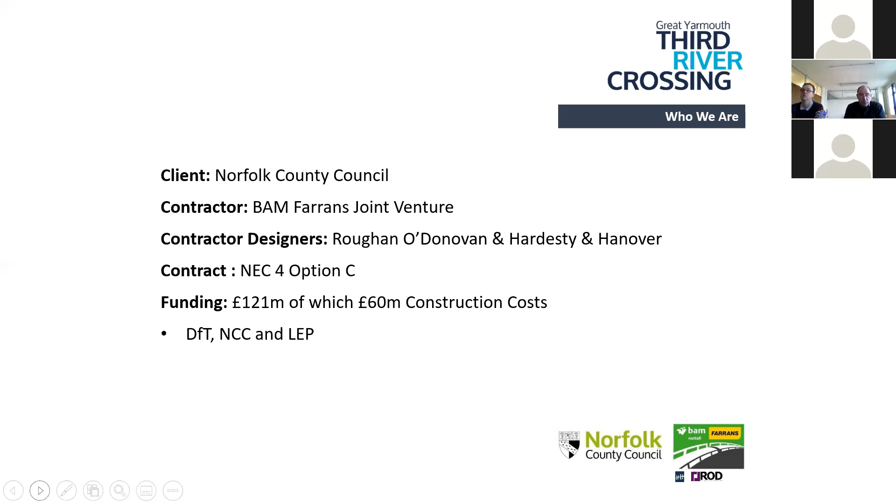So just to take you through the history of the project - development work commenced back in 2003, but Great Yarmouth has had a desire for a third river crossing for many, many years. Prior to that, I can remember it being talked about in the 1980s. It's strangleholded by just one bridge into the main area of Yarmouth, which has been a bit unreliable in the past, so it's going to be of great benefit to the town and community when it's finished. So development work on the project actually commenced in 2003.

A number of options were developed and assessed, and there was even a tunnel option considered. Work was taken on in a couple of stages, and the preferred route was adopted by the County Council in 2009. By adopting the route, the County Council accepted blight impact on the residential and commercial properties that were affected, and they had to invest a large sum of money in order to secure those properties.

Things went really quiet until August 2016, when the County Council secured some funding from the Department for Transport to prepare an outline business case. In November 2017, the Department for Transport granted the proposed scheme entry into their programme for large major infrastructure projects.

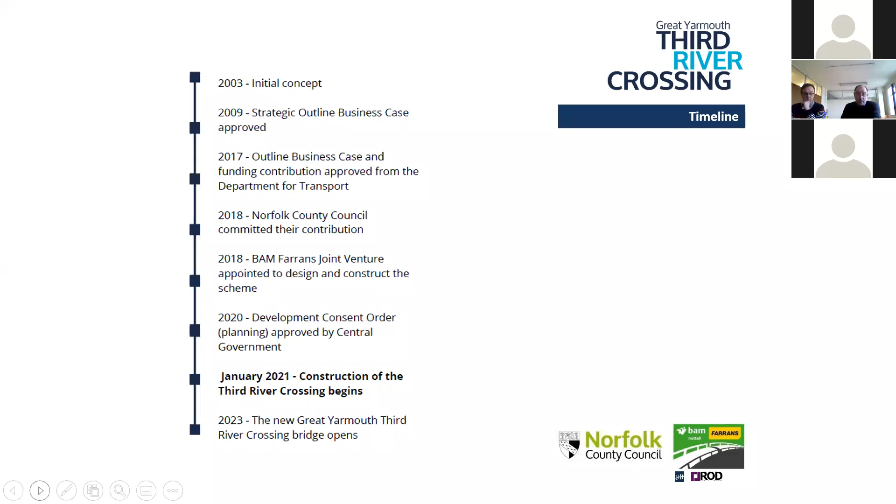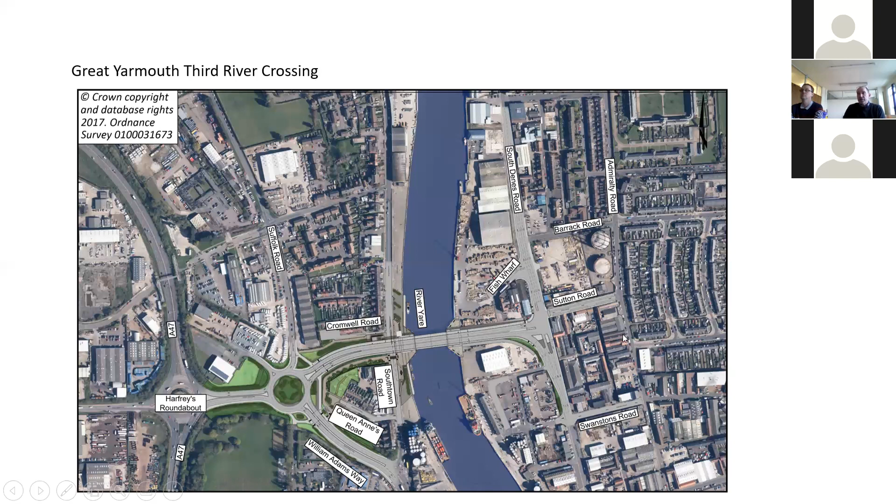So this is the scheme itself. As I said before, it runs from Harfrey's Roundabout on the west across to South Denes Road on the east. We have to do some improvement works to William Adams Way, as well as build a new roundabout which will link Queen Anne's Road and Suffolk Road to the new bridge. The bridge will run across the River Yare and link up with South Denes Road, at which point there will be a traffic signal controlled junction. We've got significant improvements to do along the length of South Denes Road, and that will then link up with the port area, which is down to the south.

So as part of the scheme, we've got 11 what were considered structures.

We've obviously got the main bascule bridge, which we call SO1. We've got SO2, which is a bridge that spans across Southtown Road. We've got SO3, the western approach embankment. We've got SO4, the eastern approach embankment, and SO5, an underpass we had to put in to enable Peel Port to operate the frontage and gain access underneath the bridge from one side or the other. We've got SO6, which is protection to some utilities.

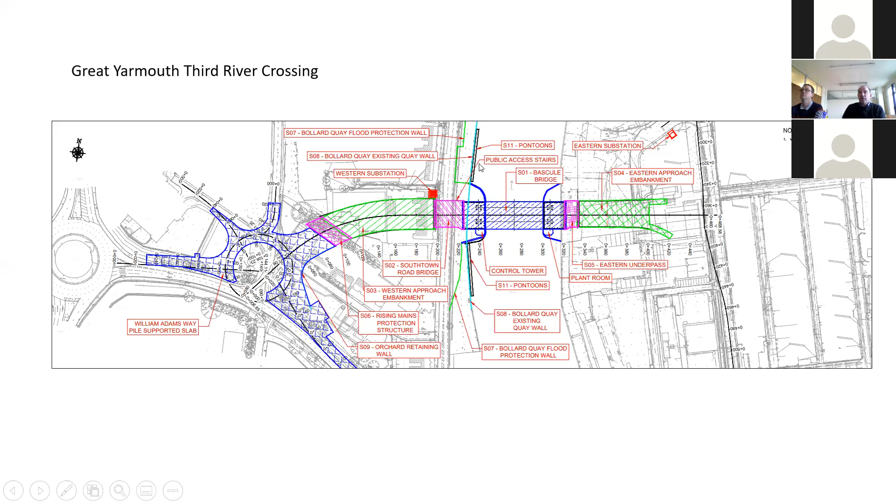SO7 and SO8 are linked with the existing quay wall. SO9 was... no, SO9 was the orchard wall, which is a small retaining wall. And SO10 was deleted, and we've got pontoons, which we consider as SO11, which is going to be mooring facilities for the smaller boats waiting to traverse underneath the bridge when it's finished.

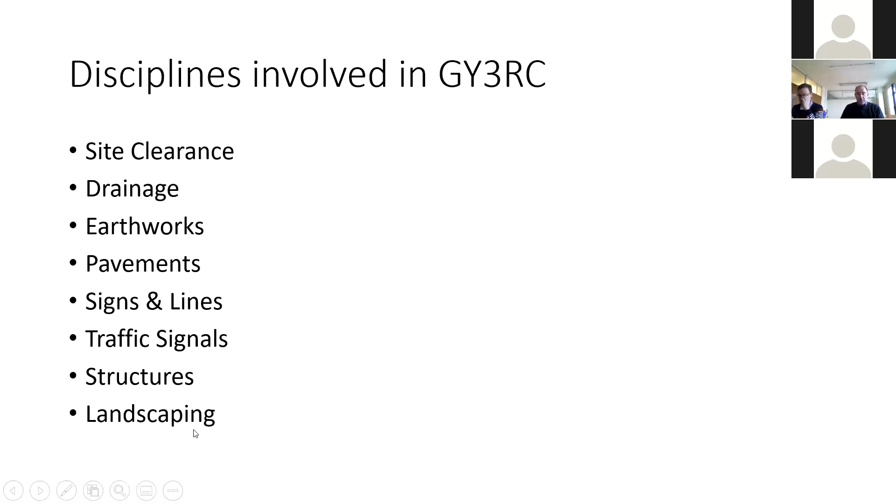So as well as the main bascule bridge, there's lots of other disciplines involved in the third river crossing works. We have site clearance, drainage works, earthworks, pavement works, signs and lines, traffic signals, the structures I've just been through, and then there's an extensive landscaping scheme at the end.

So as part of the design development, one of the requirements of the contractor was to develop a BIM model, not only to help in the design for clash detection, to allow the designers to plot all the utilities, plot all the various piles, plot the underpasses, just to see how everything worked.

This was an important part of the process. Not only does it help during the design process, but it also helps during the actual construction process. It enables the site team to work and actually update the model as we go through, so any changes carried out to the piling, the road alignment, or any unforeseen utilities, we can pick that up.

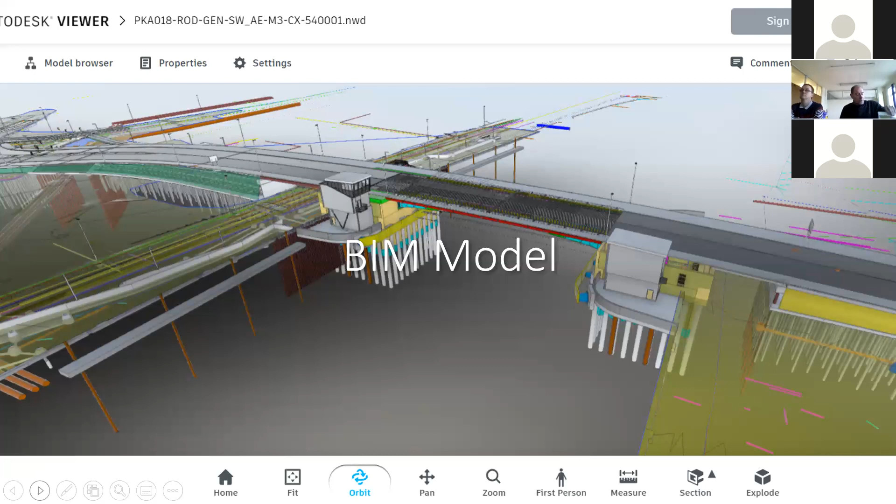Before we could start, we had to do all sorts of surveys, environmental surveys, noise surveys, etc. One of the surveys found out that there were resident water voles in and around the area, which were due to be built on.

Water voles are a protected species, and therefore Norfolk County Council had to apply for a licence from Natural England to relocate the water voles elsewhere. A couple of the areas identified, which were close by, needed significant work to improve the habitats. That was done in agreement with Natural England, and it formed part of the licence. It was carried out by working with the Internal Drainage Board and their ecologists, and also the contractor.

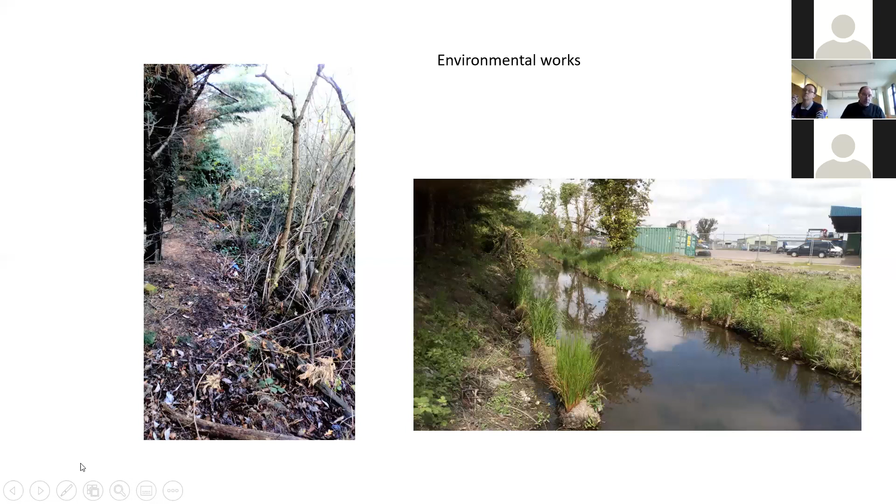This is an example of one of the ditches which runs behind the site, where very overgrown trees were laying over the watercourse. The water flow wasn't good, the quality of water was poor, and after it got cleared, it was planted with coir mats and coir rolls to help improve the margins and give the voles a suitable habitat to be relocated, which was carried out in April last year. We actually managed to catch 8 water voles and successfully translocate them to their new homes.

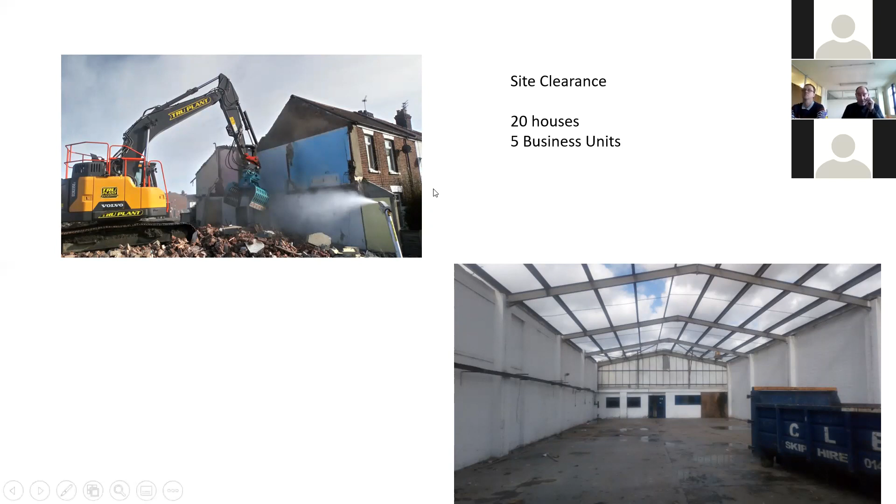Another part of the initial works was demolition of existing houses. We had 20 houses and 5 business units to clear. The completion of the demolition was May 2021, and that marked the first major milestone for the project. It was quite headline news in and around the area that we'd reached that milestone.

As with most major construction infrastructure projects, there's existing utility services to deal with, either protect or divert. In our case, we had 45 service diversions, as well as disconnecting all the utilities and services to the residential and commercial properties which we demolished. On the left-hand side, you can see a water diversion combined with a gas diversion, and also an electricity diversion, all in very close proximity. This is where the BIM model really helps, allowing you to see what space you've got and how you can plan in advance to get the utility diversions to work.

On the right-hand side here, this is structure SO6. It was a late addition to the project. The water mains weren't identified until trial holes were done, and the only way we could protect the water main was this structure, as there was no room to divert it. Anglian Water wanted it protected, so we had to build a large structure over the top.

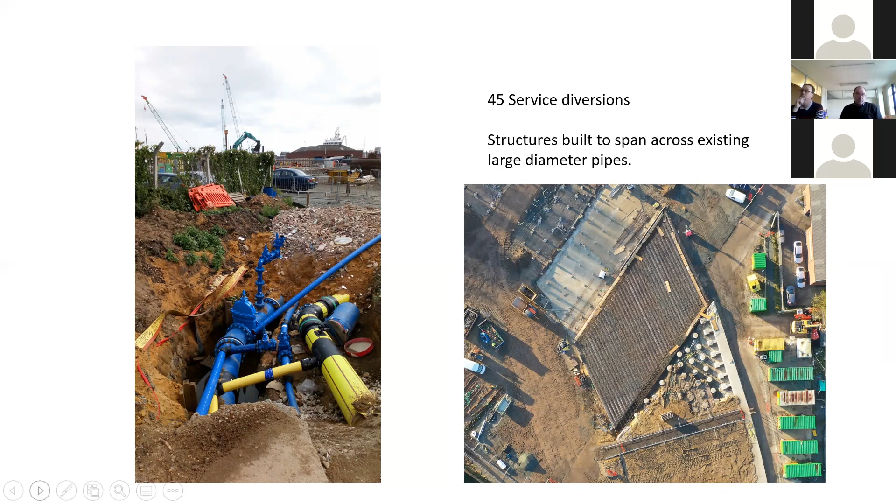The work consisted of constructing two cofferdams, one on the east, one on the west, and both cofferdams have vessel impact structures to either side. The piles themselves were manufactured in Turkey. They were 33 meters in length. There's a combination of tubular steel piles and sheet piles required to form the combi wall, and they were delivered by ship from Turkey.

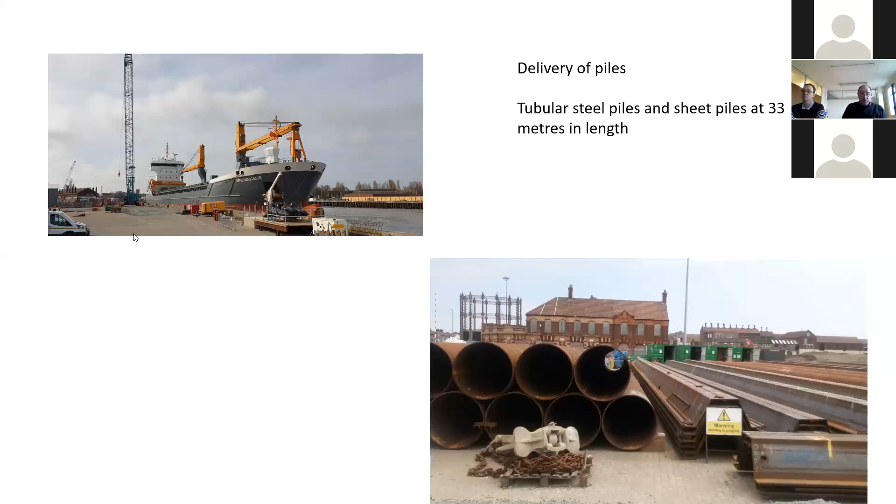It was an important time for the project because the delivery of piles was key to meeting the programme. The installation of the tubular and sheet piles, which form the cofferdams and also the vessel impact structures, were driven in, as you can see, from a crane mounted on a jack-up barge. It was done by a combination of vibration and hammer driven to their various depths.

There are a few challenges along the way. Obviously, when you're starting out driving such large piles in, the first row was fair to say a learning curve. Once that learning curve was overcome, the piling was carried out very successfully. It commenced in May 2021 and was completed by October 21.

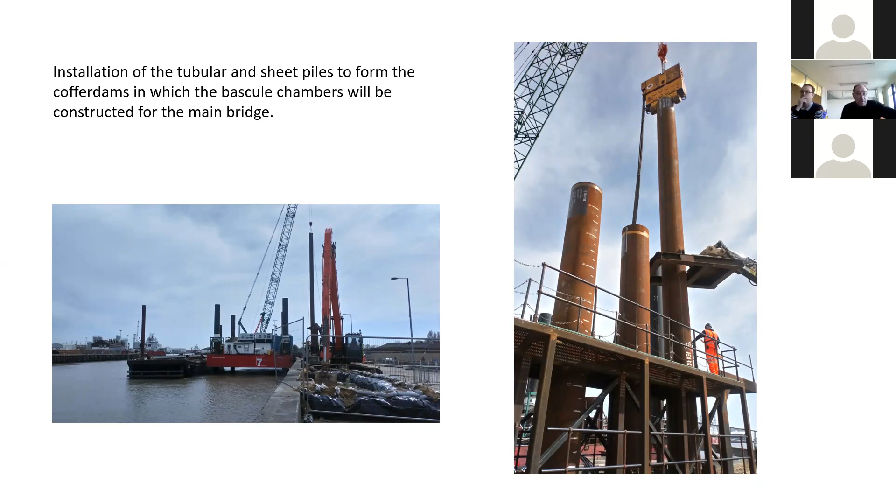This slide is just a view inside the cofferdam once the piling was completed. It's a combination of sheets and tubes, and we also had to drive some trunnion piles in here, which support the actual main bascule itself.

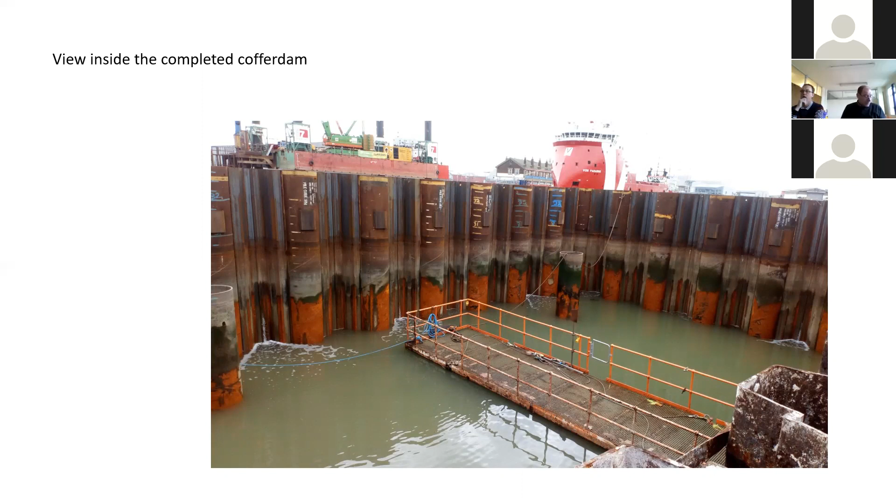Very significant temporary works were required to make a secure area for the guys to work in, and the water levels in the river can be up to 3 or 4 meters. There's a very large tidal range on the River Yare at this point, and it runs very quickly, with a wide tidal range of about 2 to 3 meters. Well points were installed in order to dewater and reduce the water level within the cofferdam, and there was a couple of vibrating piezos either end, just to monitor the actual level of the water underneath the excavation.

Following the excavation of the cofferdam, again one of the major milestones within the project was to get a concrete pour done into the base of the cofferdams. It was a very ambitious target, a very ambitious program. We had the first concrete pour on the 25th of November. Roughly about 950 cube of concrete was placed. The concrete pour started at 5 o'clock in the morning, and it was completed by about 7 o'clock in the evening, with the finishing off running into the early hours of the morning.

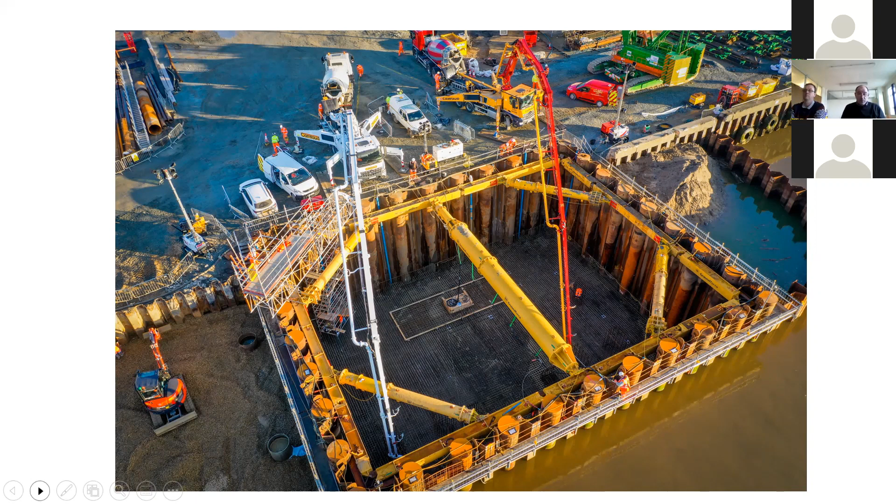This is a view looking southwards down the River Yare towards the river mouth, showing the narrowing of the channel. We've had to maintain a 50-metre width between the channels at all times to allow Peel Ports to maintain operation of the port. It's a very busy port, with some quite large vessels mooring through here which serve the wind farms and also the North Sea oil and gas fields.

So we've had close liaison with Peel Ports when we've been putting the cofferdams in.

Moving across onto the western side, the ground conditions were challenging, very peaty, with deep areas and pockets of peat. So the only way to achieve a sound foundation for the approach embankment was to do some significant piling. In total we've had 1,400 precast concrete piles, about 1,000 on the western side and about 400 on the eastern side.

One of the big challenges was the supply of the piles. Because of the shortage of lorry drivers, the piles were manufactured in Ireland and transported across to Liverpool. The shortage of lorry drivers in the country meant the delivery of piles was becoming a program risk. To mitigate that, the contractor decided to commission a ship, which brought 850 piles from Ireland around the coast to Great Yarmouth, where they were stored on the Peel Port side. That risk mitigation was very successful.

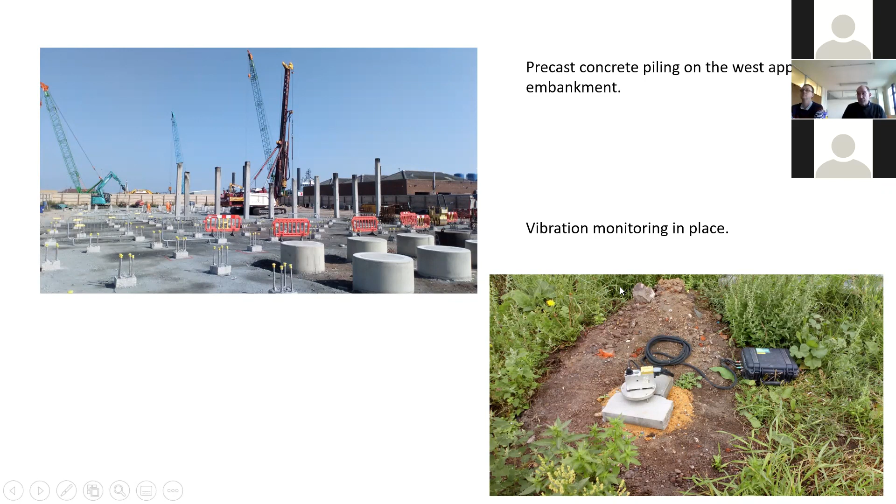We've been liaising very closely with local residents because some of the houses are very close indeed. This photo from the drone shows the properties on Cromwell Road, which were less than 15 or 20 metres away from the first line of piles, and some properties on Southtown Road, which were very similar. You can see the pattern of piling there.

So you've got the capped off piles, the edge beams, and the running beam, which has then been backfilled. That will provide the foundations for a load transfer platform to be constructed, which will spread the load evenly across so that we can build it up.

The embankment runs from about 1.5 metres in height - this is the corner of SO6 - through to about 7 metres. You can just see the line of piles there for SO2, which is the Southtown Road bridge. At this point here, we're roughly 7 metres in the air.

Southtown Road bridge will be constructed while trying to keep the traffic running. It's a strategic route into Great Yarmouth and a main bus route, so we've had to liaise with the bus companies and our streetworks people to make sure the network is maintained throughout. There's also a lot of other projects going on in Great Yarmouth, and we have to work closely with them to make sure the traffic flows are maintained.

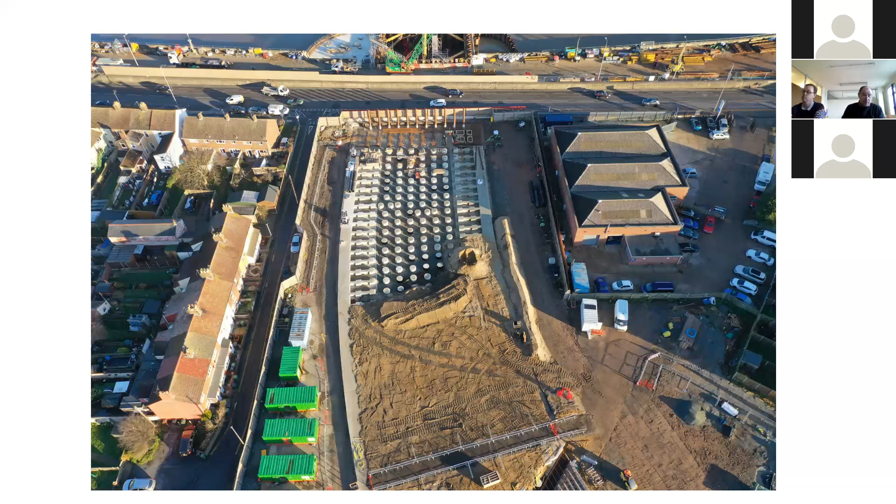Looking across onto the eastern side, the piling hasn't started - well, the piling has probably started today on the eastern side. This is the old Dalton public house, which we've got to maintain because the frontage is a listed building.

You've got South Denes Road, which runs along here, so that's going to be subject to a significant upgrade. And in and around this area, we're going to have the traffic signal control junction, which will monitor the traffic as it approaches the bridge and off it.

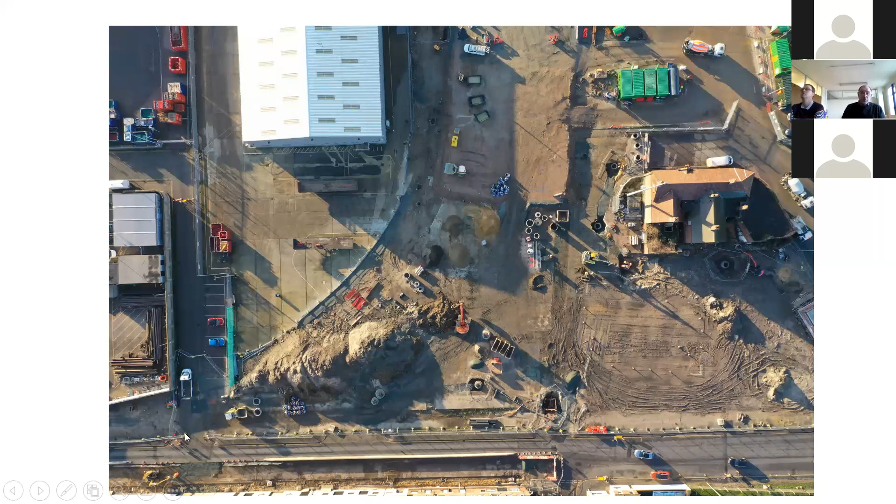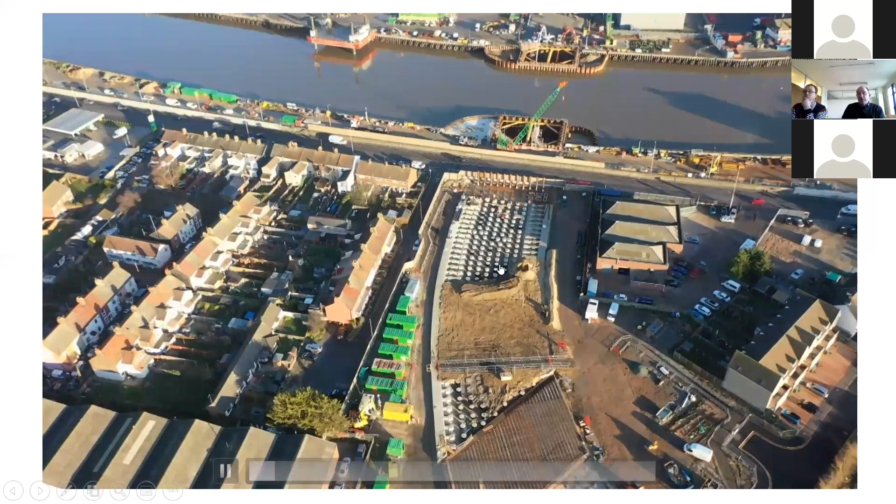We've been having a drone survey done on a monthly basis, so I thought you might like to have a quick look at it. It runs for a couple of minutes - you can see here the piled foundations on the western side, and the structure itself.

This was taken during the concrete pour.

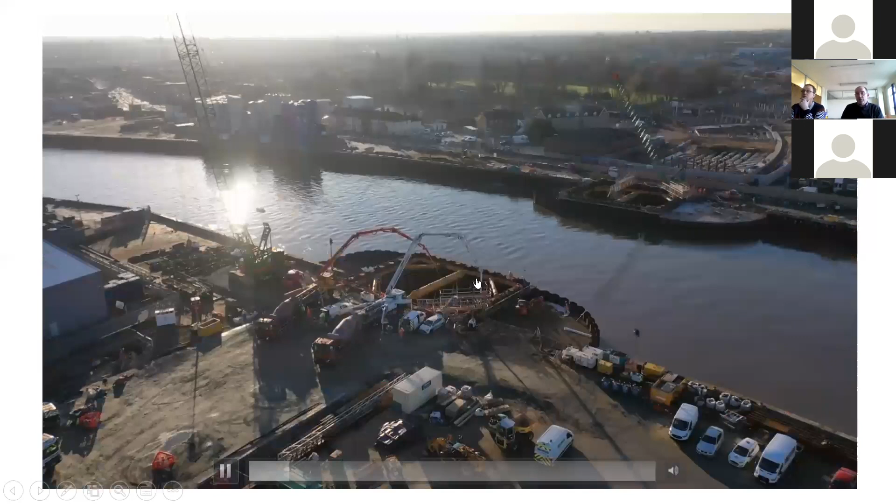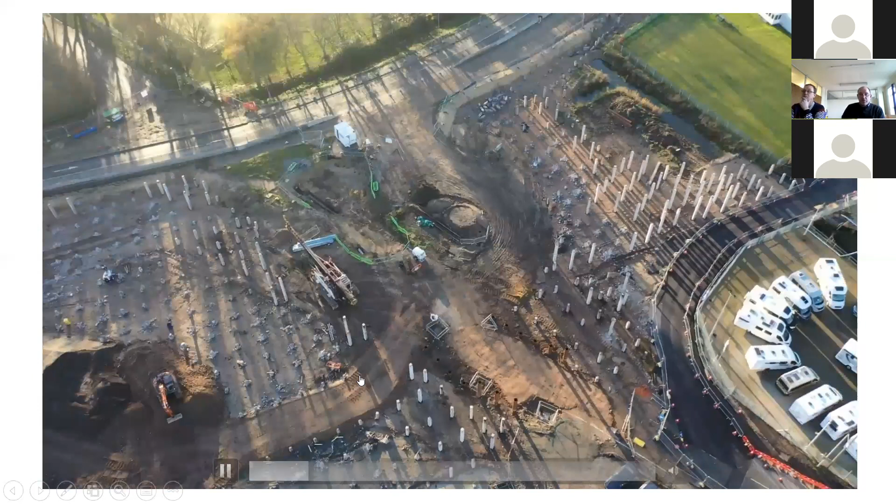So this is the roundabout, which we haven't talked very much about, on William Adams Way. You can just about see the shape of it forming now. The drainage has been very key to the project. We've had to work with the internal drainage board, the LLFA, to work out the capacities for the drains to allow it to run into the existing ditches. We have a large attenuation tank to build on the side here, which will help sort the flows out. They go into the various ditches in and around the Yarmouth area.

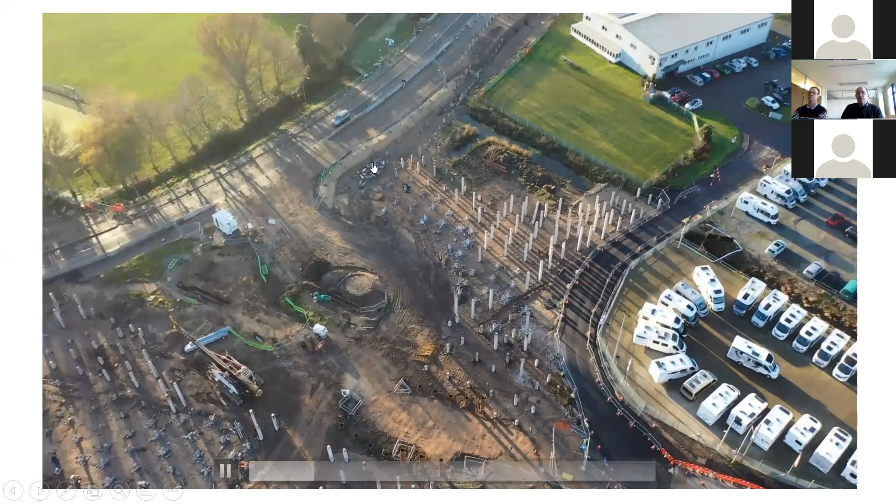I'll just keep running through it. So this is William Adams Way, which leads onto Harfreys.

So you've got the two main cofferdams, and you've got the vessel impact structures. On the southern side of the cofferdams, there's going to be 2 control towers. The main control tower is going to be on the western side, with the power plant on the eastern side. There's going to be a substation on either side, so we've had to work very closely with UK Power Networks in order to build a bespoke substation on either side to be able to power the bridge.

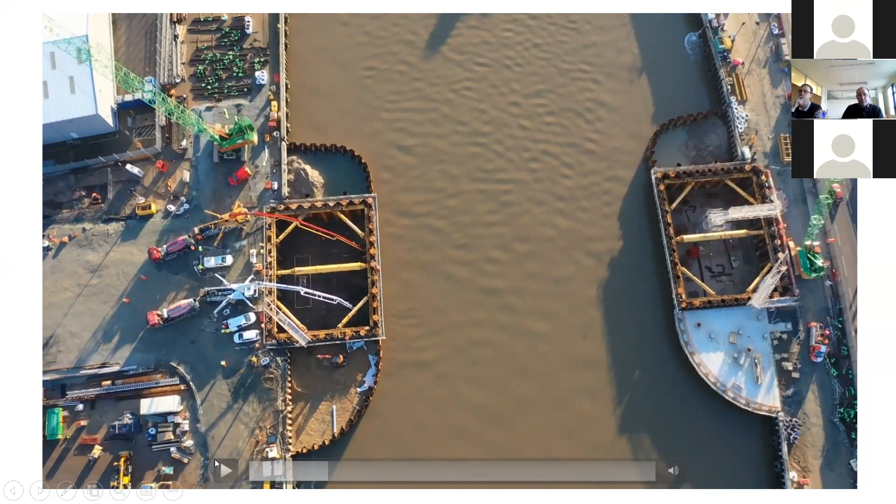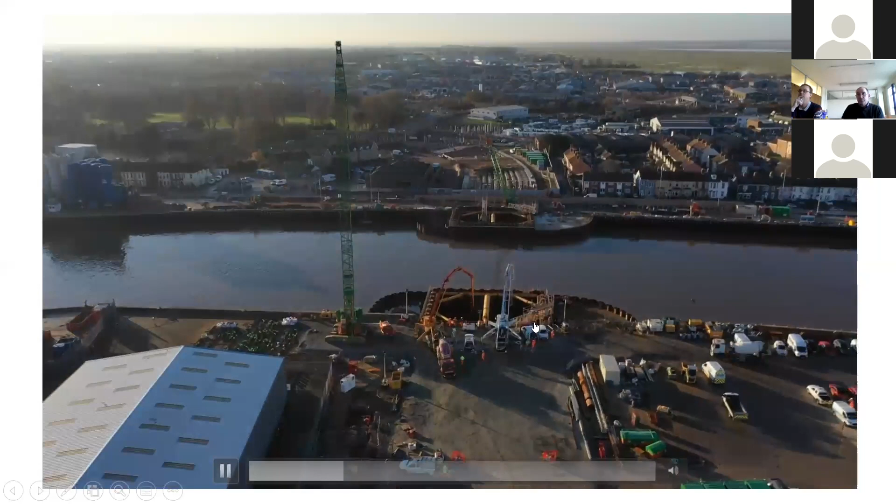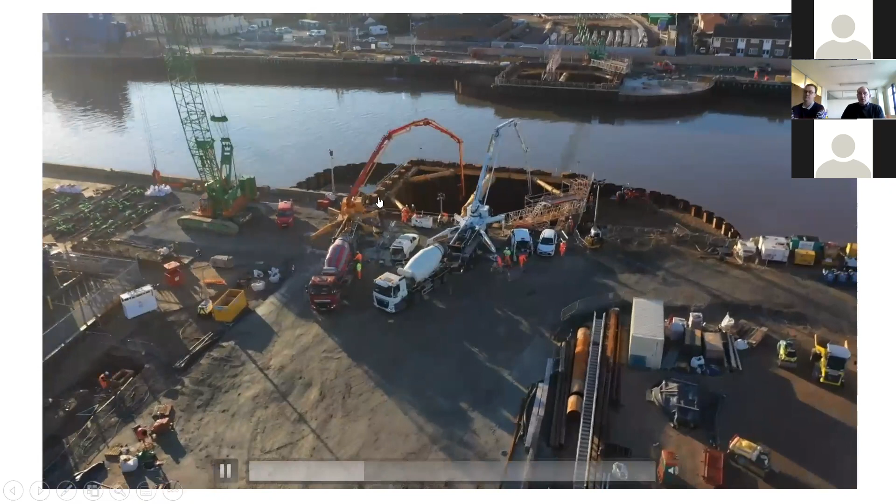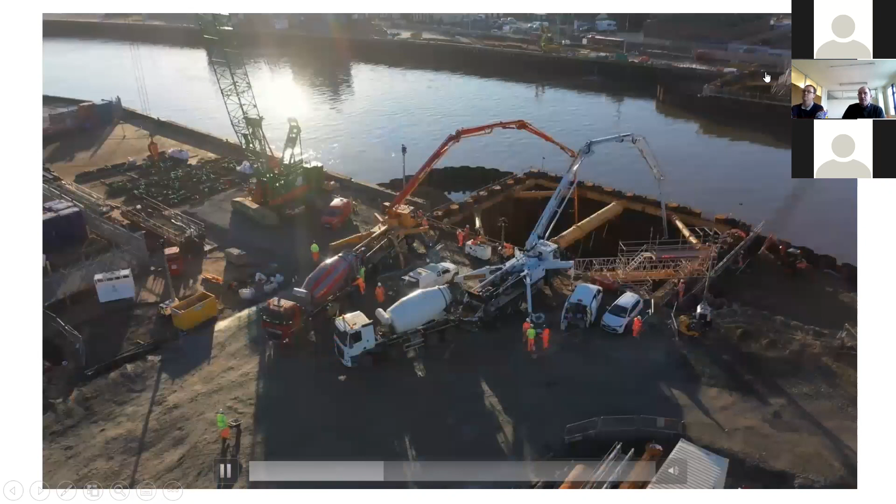See the concrete pumps? We were able to work with 2 concrete pumps on the western side because of the available space. Space on the eastern side was very tight because of a bollard quay, which is a narrow strip through here, so we could only operate with 1 pump. So the pour on the western side was carried out a bit quicker than that on the eastern.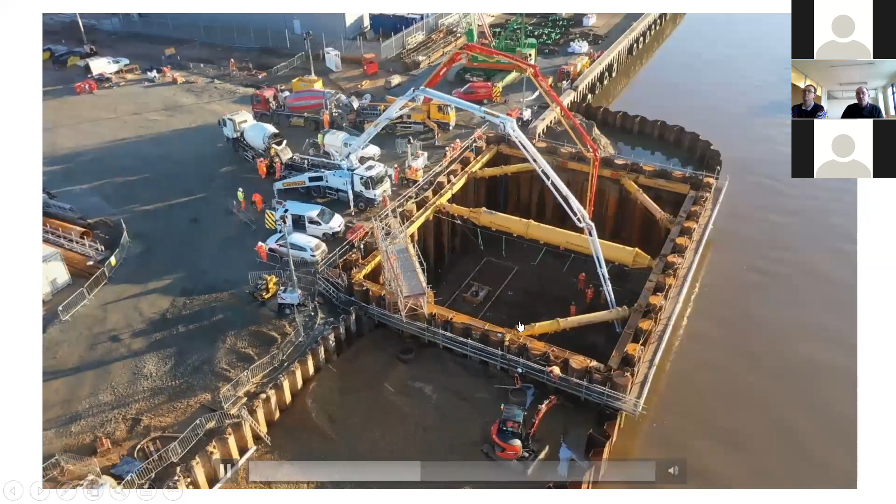You can see there how close the houses and commercial properties were to the piling.

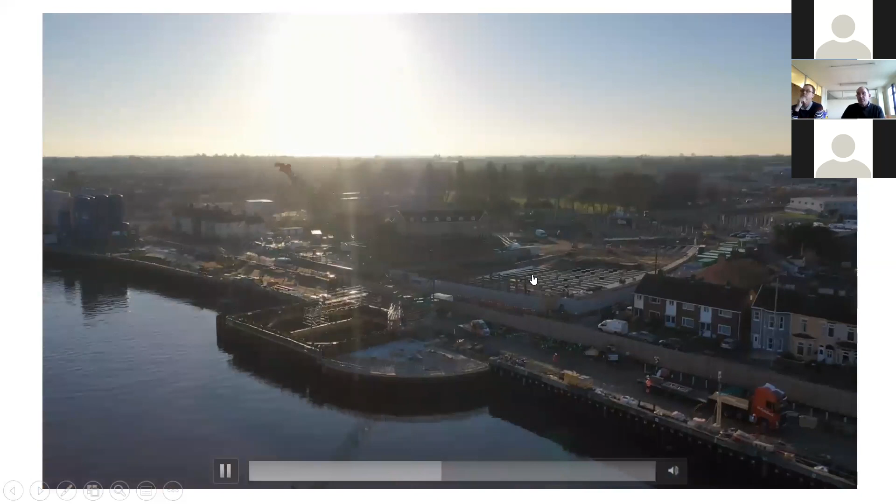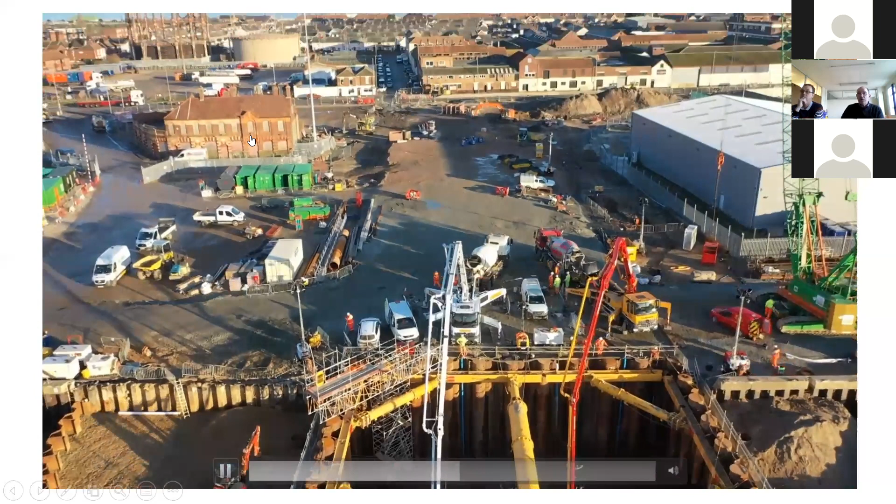And that's the eastern side where the Dalton Public House and the traffic signal control junction is going to go.

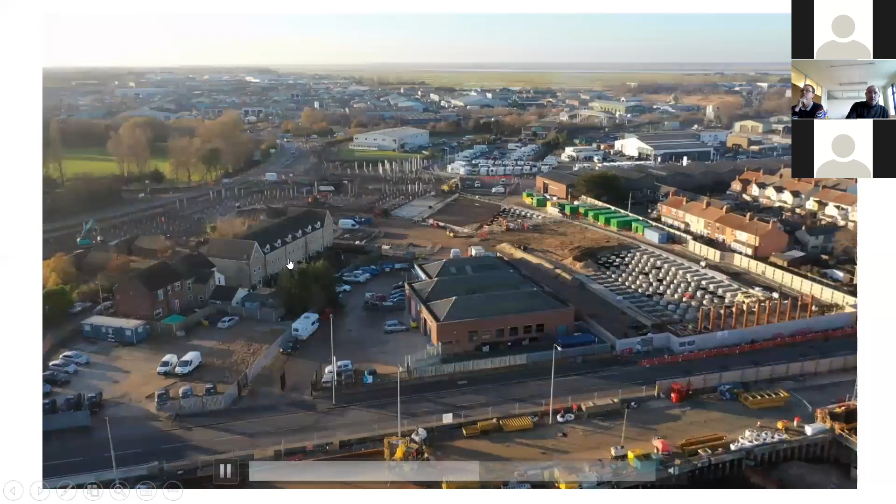So this is the stage we're at the moment. We had a good year last year. All the milestones were achieved, and it was a very good team effort.

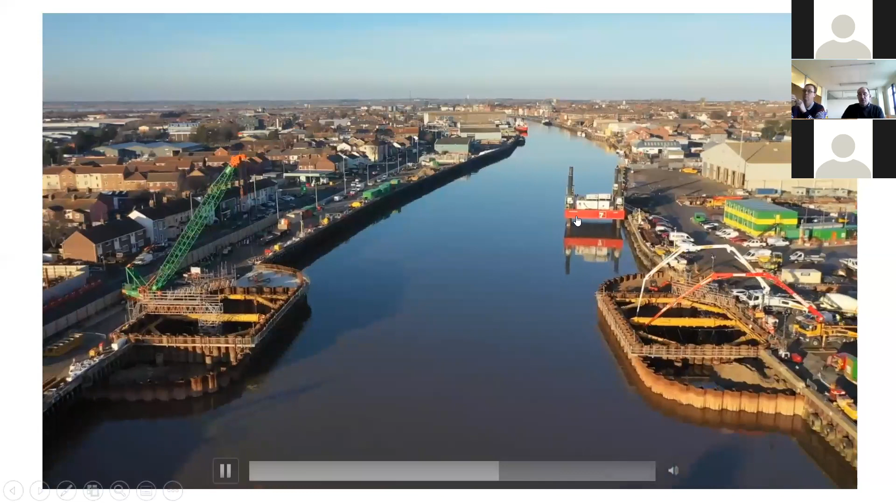And there's the jack-up barge sitting on the side, which was used to install the piles. We've got the site compound on the eastern side there.

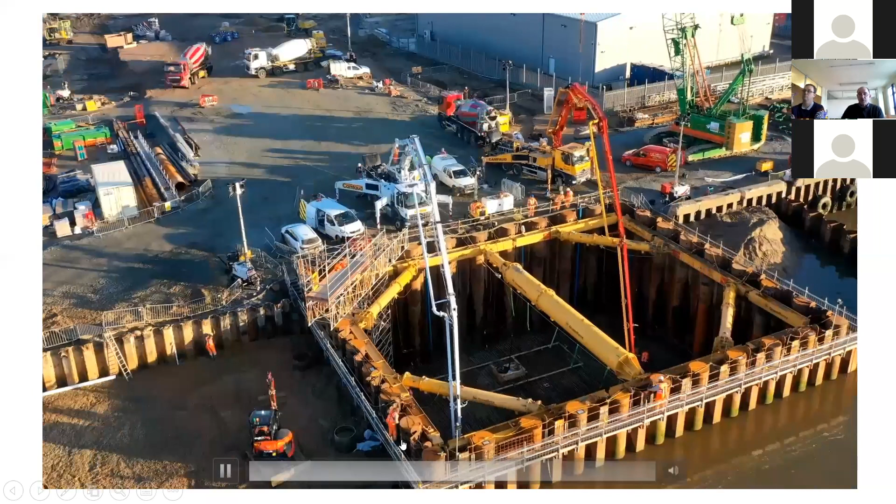That's just about it. We'll finish it there. Okay, so that's where we are at the moment.

Just to look forward a little bit, what we've got to come up in the coming months. Obviously, the foundation to the cofferdams is now in. Work will then progress to come out of the ground and get the cofferdam walls and the bascule chambers built, and the control towers progressed.

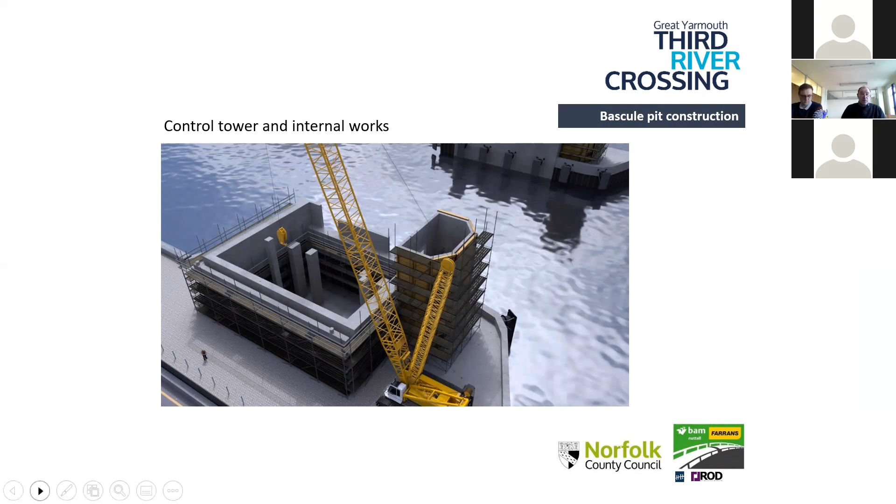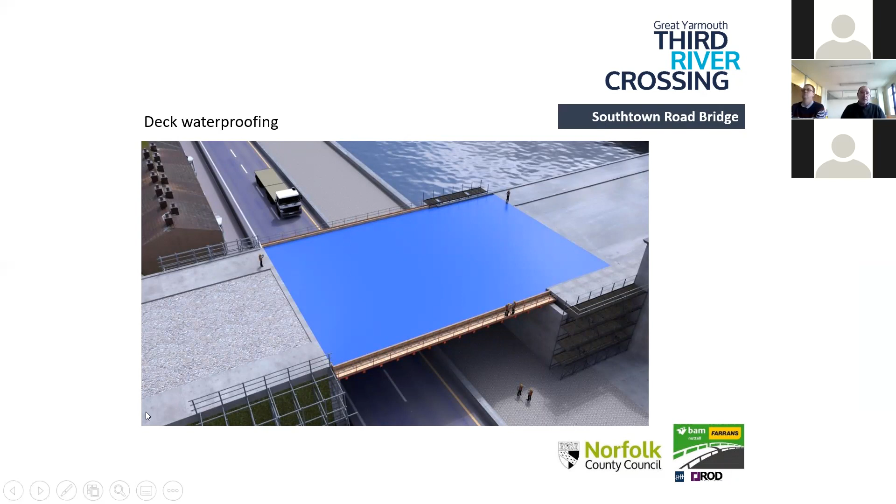The approach embankments are reinforced earth walls. So we've got a load transfer platform on the bottom here, which sits on top of the precast concrete piles. And they're going to be built up in steps.

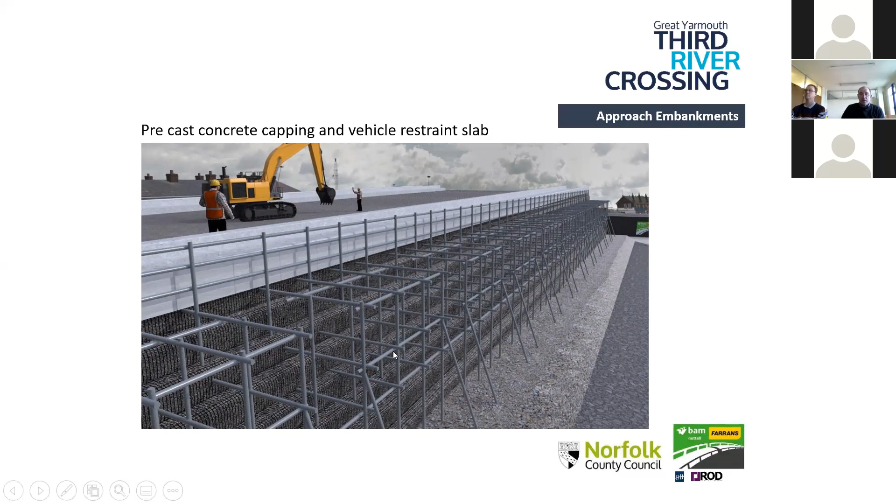One of the requirements on the western side is that we have a green wall. That's because it'll soften the visual impact. At this point here, we're nearly 7 meters high - you can probably gauge that just by seeing the top of the buildings there. So we've got this green wall going in on the western side.

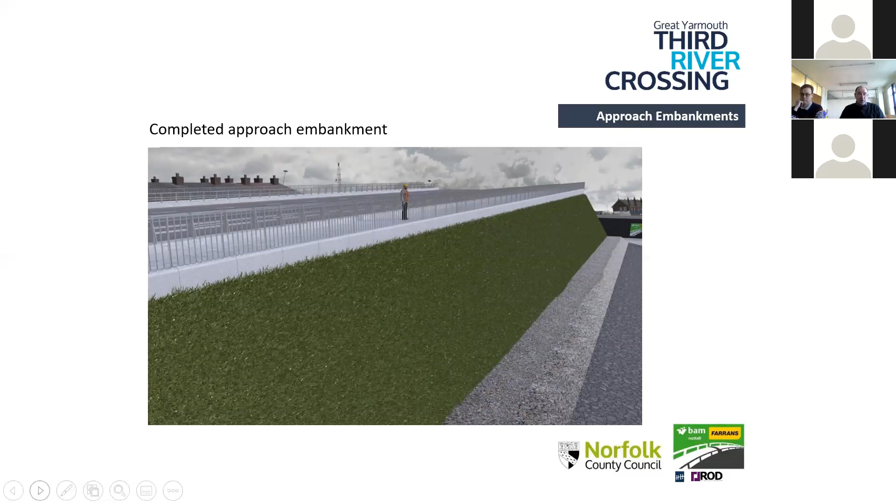On the eastern side it isn't quite as important because we're in the industrial area, and we will have just ordinary precast concrete panels. Again, it will be a reinforced earth wall, but with precast concrete panels.

So the bridge leaves themselves have been manufactured across the water in Holland by a company called Victor Buyck. They've been brought across to Great Yarmouth on barge. The first one is due to arrive in October this year, ahead of installation in November.

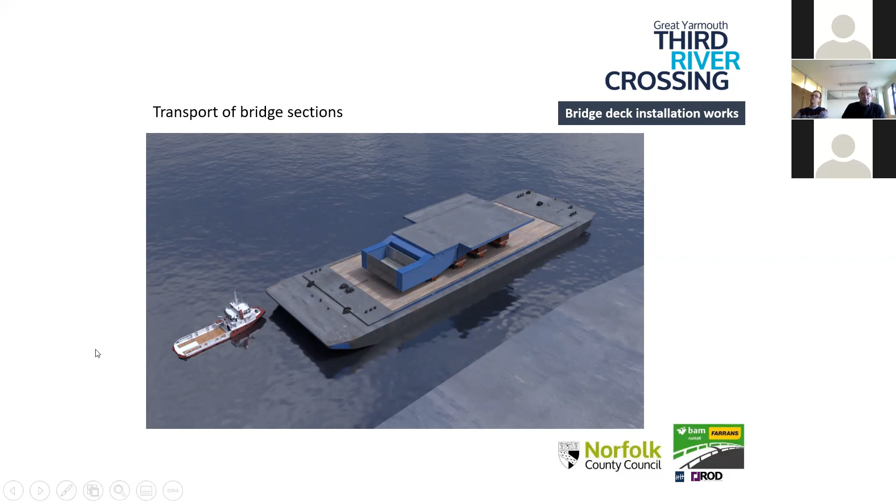We have, as part of the DCO, been granted 3 72-hour river possessions. So hopefully the 2 leaves will be installed in the first 2, with a third as a contingency. There's an awful lot of planning to go ahead in order to get the barge in the correct position, again liaising with Peel Ports because this is one of the main berthing points.

And the second leaf is due to be delivered in November and installed in January. There's an awful lot of works to do within the bridge structure itself - the MEICA and the hydraulics all need to be sorted out, and we'll be working with specialist companies to achieve that.

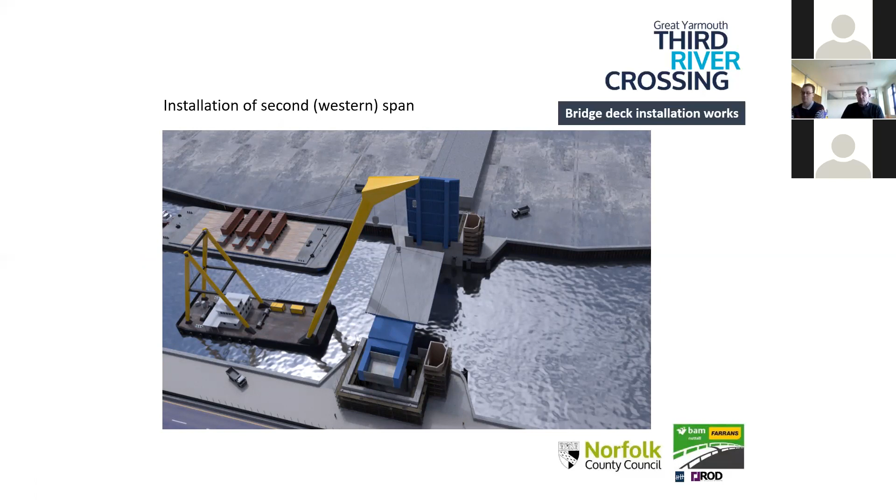And this is what the final structure should look like, with the fendering in front to give the quay wall a bit of protection, and the bascule leaves. The scheme will have considerable testing, about a 2 to 3 week intensive period, and then it has to be commissioned. Hopefully everything will be finished in time to open the structure for April, May 2023.

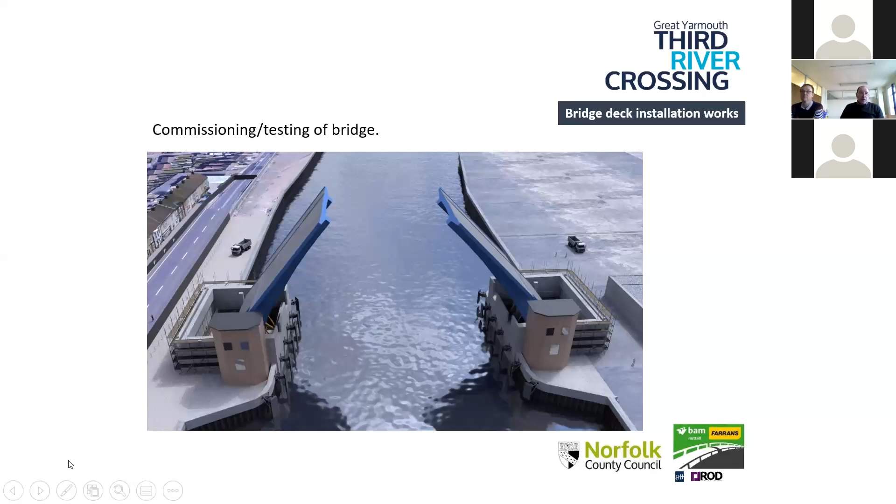So that's the end of my bit. I'll hand it over across to Malcolm, who's just going to run through some stuff we've been doing with the local community, local supply chain, etc.

Okay, thank you, Tim. My name is Malcolm McAllister. My role on the project is community liaison manager, and I've been involved since tender stage and the formation of the joint venture, some years ago now. I'm based in Great Yarmouth with Tim on site.

So what's my role? This project is a high-profile scheme with a big impact on the town, a one in a generation project. We want to communicate the activities we're undertaking with all the stakeholders not directly involved in construction — local residents, businesses, various groups, but also the supply chain, and fundamentally our engineers of the future, trying to engage all the schools and colleges. So we want to maximise the positive impact of the project on the local community.

Working with the supply chain, we have a long history in Great Yarmouth and Norfolk as a contractor. We've built the outer harbour, various flood defences, works on the inner ports. We've had a 20-year framework with the Environment Agency, and we've got an office in Norfolk as well, which I'm sure all helped Norfolk County Council select us as the contractor to deliver the project.

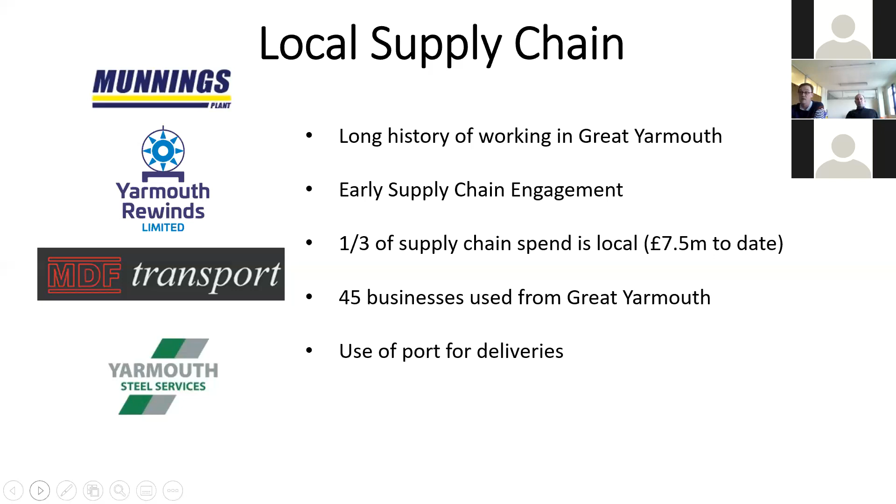With regards to the precast concrete piles, there's another positive story spinning off the use of the port for their delivery. We saved an estimated 150 tonnes of CO2 by getting the piles delivered to site via boat rather than lorries, saving about 80,000 lorry miles. So yeah, there's a nice story there.

Investing in the local community.

About 70% of our employees, either directly employed by Farrans or as labour employed by Farrans, are from the local area, which is excellent for the local economy.

Apprentices - we have various apprentices on site. Not only trade apprentices, but also professional apprentices in engineering and quantity surveying.

Long-term unemployed - we have various positions we've taken on, including a couple of Kickstarters. There's a government-backed Kickstarter program, and we have 2 Kickstarters on site at the moment, people who've been long-term unemployed under the age of 25. We're giving them 6 months paid work experience, and hopefully they'll be offered a job afterwards.

So careers, aspirations and upskilling - the Kickstarter is part of that, and the NVQ, but we're also promoting the project by getting into schools and engaging with children of all ages.

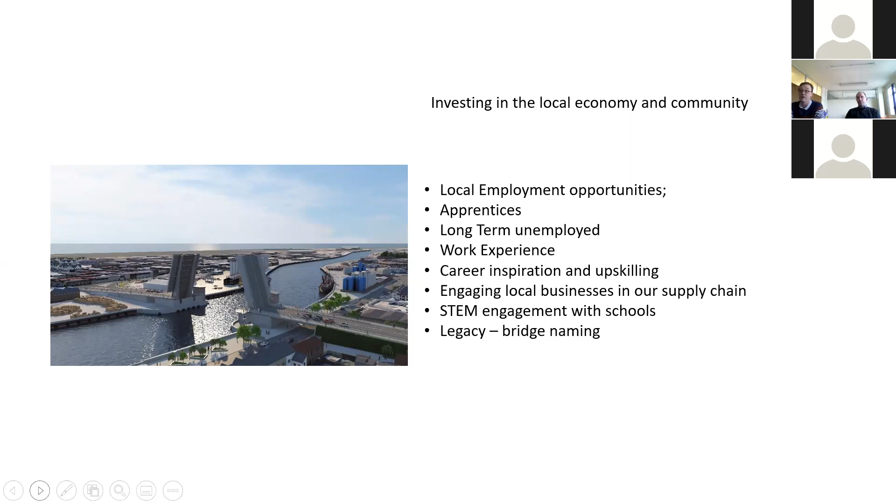Also for legacy, this year we will be undertaking a bridge naming ceremony, where we'll be engaging with the schools and various organisations to come up with a bridge naming.

We'll also be supporting the Tide and Time Museum in Great Yarmouth with a bridge exhibition planned for next year, and the BIM model and various other models will feature within the exhibition.

So my final slide is keeping everyone informed - not only the schools and the supply chain, but also the travelling public, residents, businesses, emergency services and local authorities. They all need to be kept up to date with any activities that may affect their line of business or work. So how do we do that?

Various ways - advanced notifications, which could be a series of emails or letter drops. Quite often before we undertake work on site that may affect the road, we have to apply for various consents from the local council, and once we have consent, we can undertake notifications to the affected parties.

We have regular newsletters - every 3 months, published electronically and/or as a hard copy sent out to local businesses and residents in Great Yarmouth. The newsletters highlight works undertaken to date, future works, good news stories, milestones achieved, and various videos similar to what was just shown.

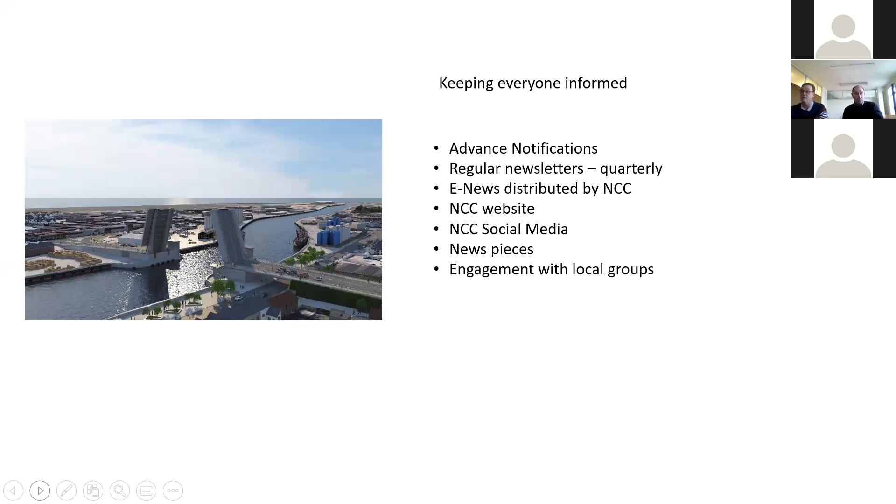Finally, with the engagement of local groups, just like yourselves, also councillors and the Chamber of Commerce, we have to try and keep everybody up to date throughout the duration of the project.